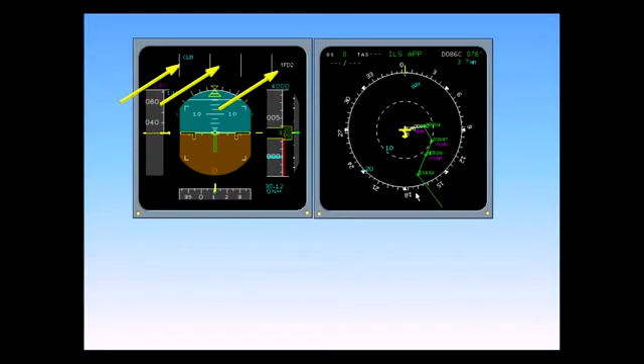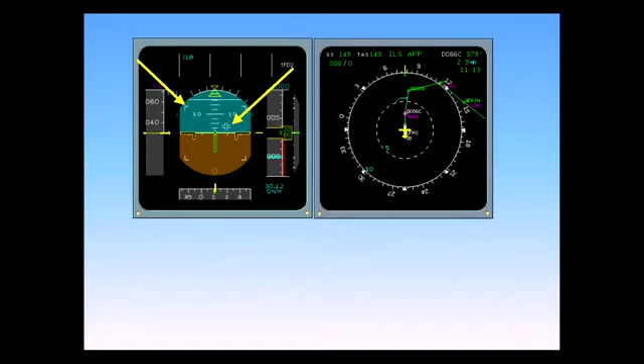Also notice the box corners toward the edges of the ADI and the Maltese cross in the center. These symbols appear after engine start and are used during the flight control check. The cross is a side stick command indicator, what the stick is commanding in pitch or roll. The box corners are stick command limits. The center of the cross should not exceed these limits when performing the flight control check.

The ground roll guidance command bar also appears after engine start, when either TOGA or FLEX is selected, and provided there is an operating localizer on the takeoff runway selected in the MCDU. It replaces the FD vertical bar and is used during takeoff and rollout for assistance during low visibility. All of these symbols disappear after takeoff.

When the thrust levers are placed into the FLEX or TOGA detent, the FMAs indicate MAN FLX 49, meaning that the thrust has been manually placed into the flex detent, and that thrust for the assumed temperature of 49 degrees Celsius has been calculated and set.

Speed select 197 in blue, meaning that a speed other than the default econ speed has been selected. A/THR illuminates in blue, meaning that the auto thrust system is automatically armed. It will engage automatically when thrust is reduced to climb.

The FMA also shows SRS as the vertical engaged mode. SRS, Speed Reference System, commands the horizontal flight director bar to a pitch angle resulting in a speed of V2 plus 10 knots. Should an engine fail, SRS will command a speed of V2 or existing aircraft speed, whichever is higher.

RWY, meaning runway track, is the engaged lateral mode. Runway track is selected by simply turning the heading knob one click in either direction while the aircraft is on the ground. The heading knob must not be pushed or pulled. Runway track can be used up to 400 feet AGL to ensure obstacle clearance during initial climb in case of engine failure.

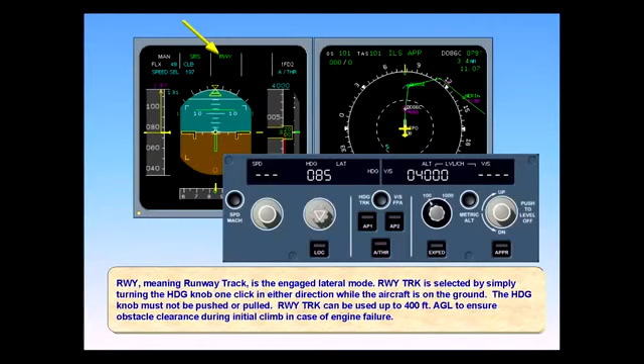At 30 feet, RWY turns to RWY TRK, runway track. This mode provides lateral guidance on the extended runway centerline based on the track memorized during the takeoff roll. The autopilot may be turned on at 100 feet AGL, provided SRS has engaged. If it has not, the autopilot may not be used until 500 feet AGL.

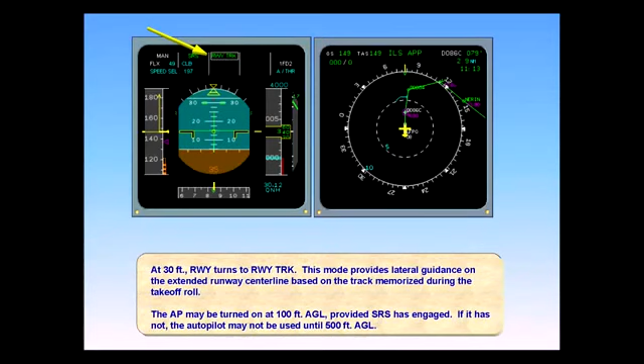At 400 feet AGL, the aircraft must be put into the heading mode. This is accomplished by pulling the heading knob on the flight control unit. At the UAL thrust reduction acceleration altitude of 800 feet AGL, a white flashing message, LVR CLB, appears in the auto thrust FMA. The FMA flashes as a reminder to set the thrust levers to the climb detent. Set the thrust levers to climb.

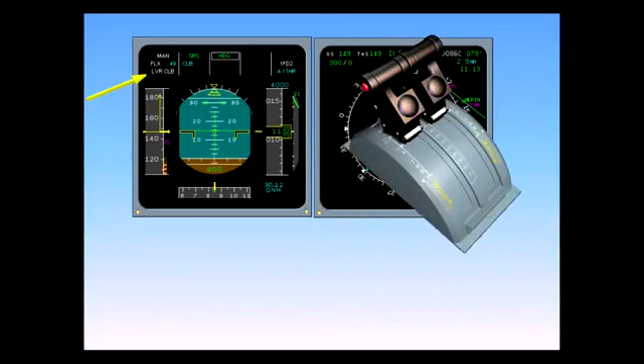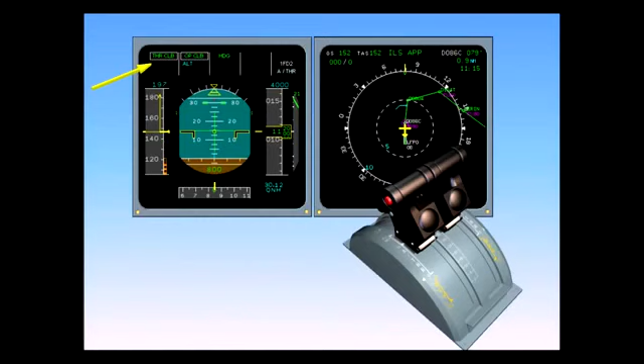THR CLB illuminates in green in the auto thrust FMA column, and A/THR turns white in the engaged status column. The auto throttles have automatically engaged. The system is in the thrust mode and commands max climb thrust.

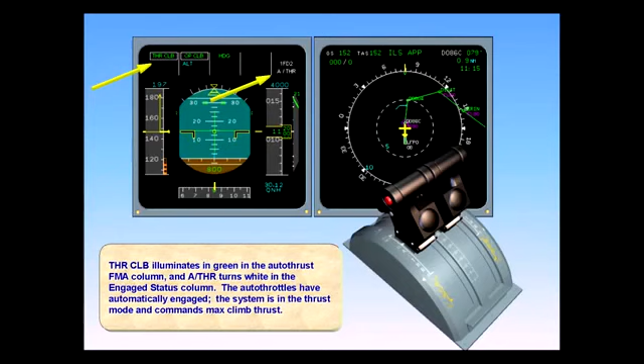Also at 800 feet, SRS has disengaged and the vertical mode now becomes open climb. Since we had changed the econ climb speed to green dot, the FMGC treats this speed as a selected speed. The magenta triangle indicating managed speed disappears and is replaced by the blue selected speed indications. Since 197 knots is off the speed scale, a blue number appears on top of the speed tape. Also, ALT is displayed in blue, indicating that the altitude capture mode is armed.

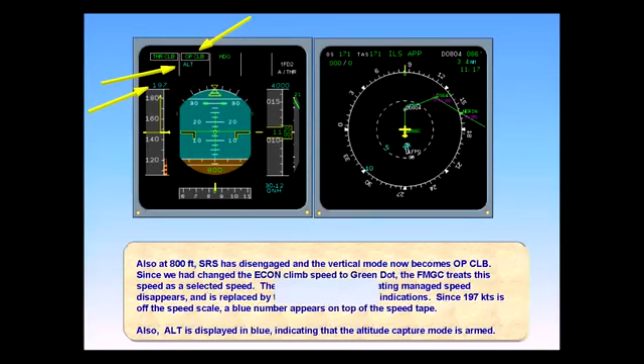The aircraft now begins to accelerate to green dot speed. 60% of the power is used to increase speed and 40% to maintain climb. Flaps and slats are retracted on schedule. Note, the selected speed number has disappeared and has been replaced by the blue triangle.

At 3,000 feet AGL, the aircraft is returned to the managed speed mode by pushing in on the speed knob. Push in on the speed knob. The aircraft is now in the managed speed mode. Managed speed indications appear on the speed tape. Since 250 knots is above the speed tape range, the indication is shown by a magenta number above the speed tape. Also note that the flight control unit's speed window has closed, the numbers being replaced with dashes, and the managed speed light is on.

The following illustration, while not yet part of United's operating procedure, is an illustration of the capabilities of the A320. While there are plans to incorporate procedures like these into the manual, at the present time the most restrictive altitude must always be set on the flight control unit.

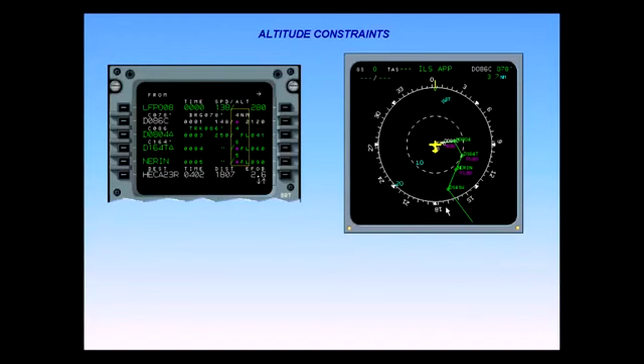The flight plan contains a SID, which was loaded into the FMGC during initial setup. The SID has an altitude restriction of 8,000 feet, as indicated by the magenta dot on the MCDU. Pressing the Constraint button on the EFIS control panel will display the restriction on the ND, whether it be a speed, altitude, or time restriction. Press the CSTR Constraint button. The Constraint button illuminates green, and the altitude constraint of 8,000 feet, which already is shown on the MCDU, is now visible on the ND.

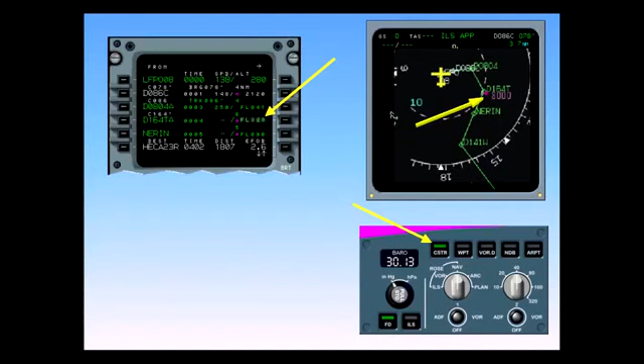We are airborne and level at 4,000 feet. ATC clears us to flight level 230, with the restriction to cross the intersection at or below 8,000 feet. First, we dial in the cleared altitude of flight level 230. Then we command a VNAV climb by pushing in on the altitude knob.

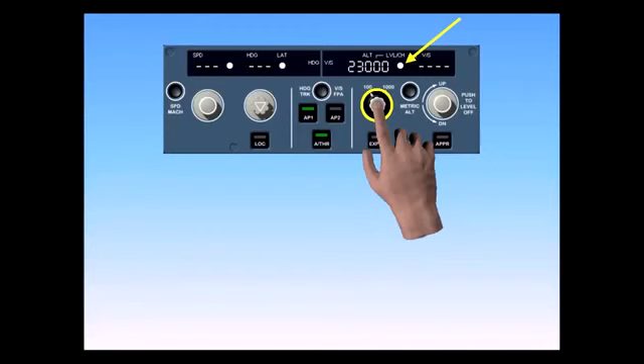Note, the level change light illuminates, indicating that the FMGC is in vertical nav, or VNAV. On the PFD, the primary indication that VNAV is engaged is climb, CLB, annunciated in green in the vertical column. The FMGS has predicted that it will reach the VNAV constraint altitude of 8,000 feet before reaching the intersection. This is indicated by the magenta level point arrow.

On the PFD, the ALT in magenta on the FMA and the target altitude 8,000 in magenta on the altitude scale indicate that the FMGC will level off and capture this restrictive altitude constraint. The aircraft is now approaching the altitude constraint. The altitude constraint mode automatically engages as indicated by the FMA. On the altimeter, the magenta target altitude indicator is moving downward.

The aircraft is now level at the constraint altitude, with altitude constraint in green on the FMA. VNAV is still armed, as shown by the blue climb on the FMA. It will automatically re-engage when the aircraft flies over the constraint waypoint. The re-engagement point is marked by the blue start of climb arrow on the ND.

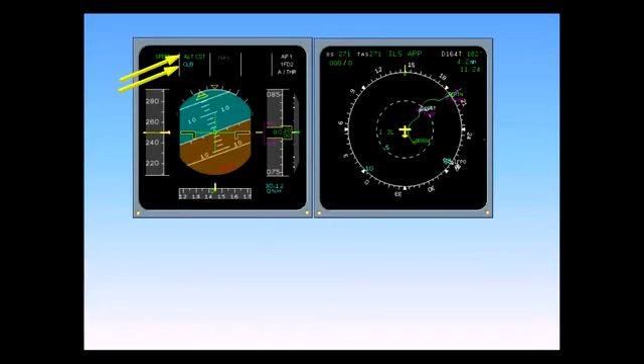You now receive a clearance to cross NERIN intersection at flight level 230, then climb to and maintain flight level 350. After entering the constraint into the FMGC, the system predicts reaching flight level 230 before crossing the waypoint, as indicated by the magenta level arrow. The system automatically reverts to the thrust climb mode, and the new constraint becomes the target, ALT and 23,000 in magenta.

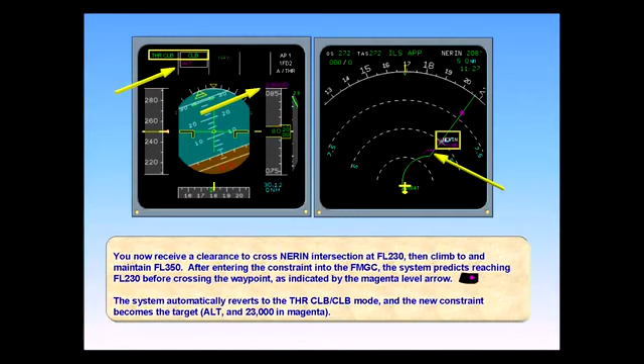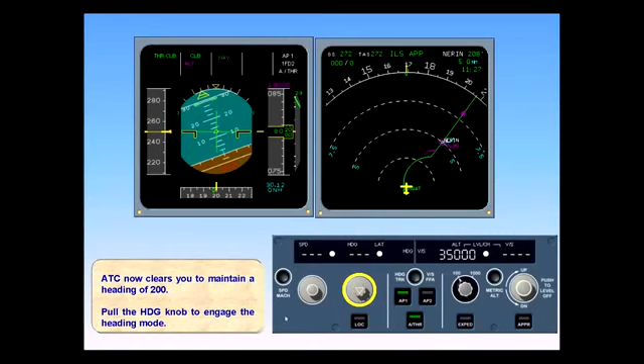ATC now clears you to maintain a heading of 200. Pull the heading knob to engage the heading mode. On the FMAs, climb is replaced by open climb, and the magenta altitude has been replaced by blue altitude in the vertical column, and heading has replaced nav in the lateral column. On the ND, the solid green line now indicates the aircraft track line, and the dotted green line is now the FMGS flight plan.

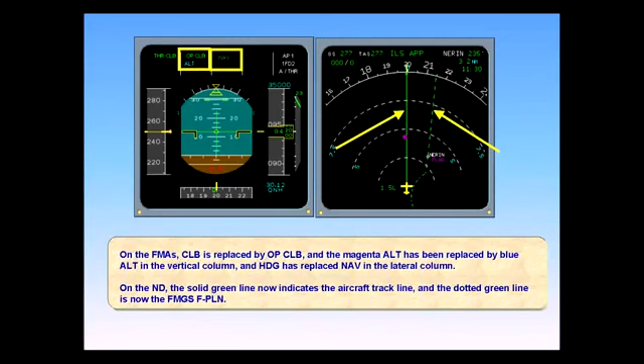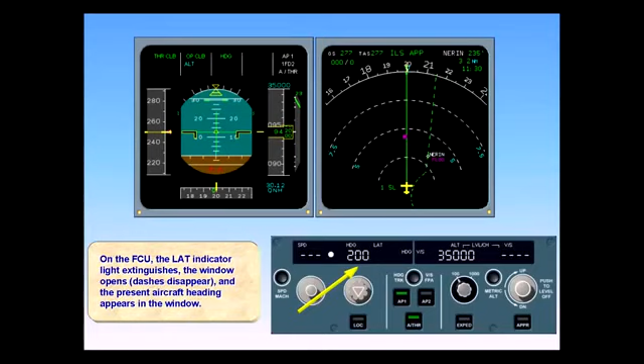On the FCU, the LAT indicator light extinguishes, the window opens, dashes disappear, and the present aircraft heading appears in the window. When the heading mode was engaged, VNAV automatically disengaged and the FMGC automatically reverted to open climb mode. ALT magenta reverted to ALT blue, and the magenta 23,000 changed to blue 35,000.

Altitude capture is now armed to the FCU set altitude, not the lower constraint altitude. When not on the assigned route, the altitude constraints which are assigned to flight plan waypoints must be disregarded. The cardinal rule to remember is LNAV must be engaged for VNAV to operate.

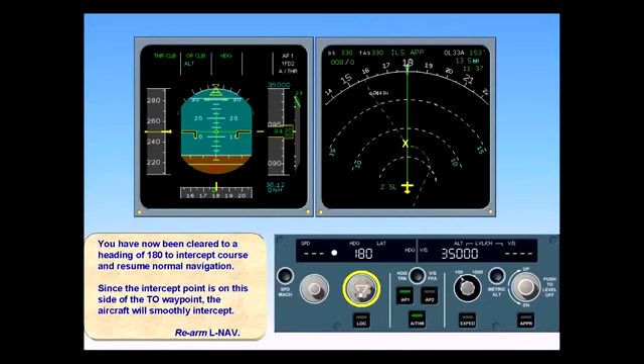You have now been cleared to a heading of 180 to intercept course and resume normal navigation. Since the intercept point is on this side of the TO waypoint, the aircraft will smoothly intercept. Rearm LNAV. Nav is now armed on the lateral FMA, blue. On the FCU, a white dot in the heading window indicates that Managed Nav is armed.

On the ND, the solid green line indicates the track line to the computed intercept point, and then the remainder of the flight plan. If the intercept statement is missing, then the track line is crossing the flight plan beyond the TO waypoint, and interception is not possible without further action.

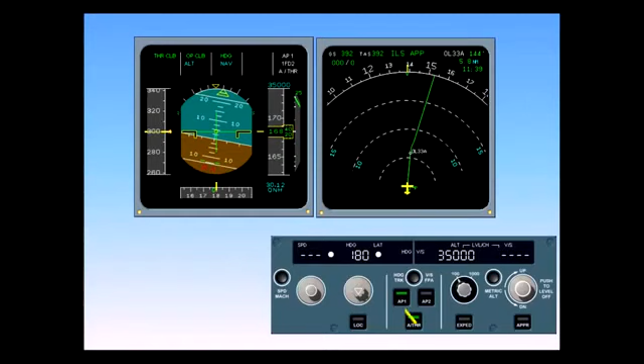When the aircraft closes with the intercept point, the nav mode automatically engages, as seen by the indications on the FCU and on the FMA. VNAV is available again, but since there are no more constraints, it is not necessary to re-engage it. Climb and open climb will now perform the same function.

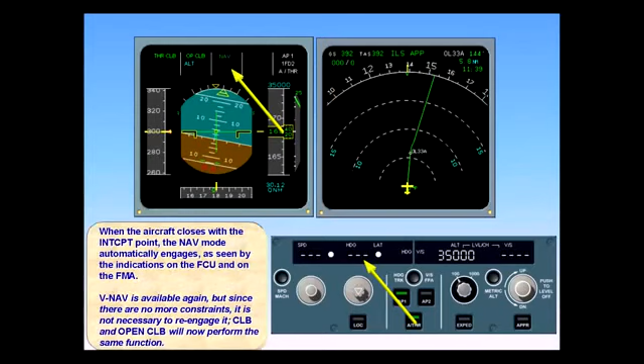Passing through the transition altitude, a yellow flashing STD message appears below the altimeter. The FMGC does not know 29.92 as anything but a QNH barometric setting. Therefore, the barometric set knob on the EFIS control panel must be pulled to set standard, STD. Pull the baro set knob.

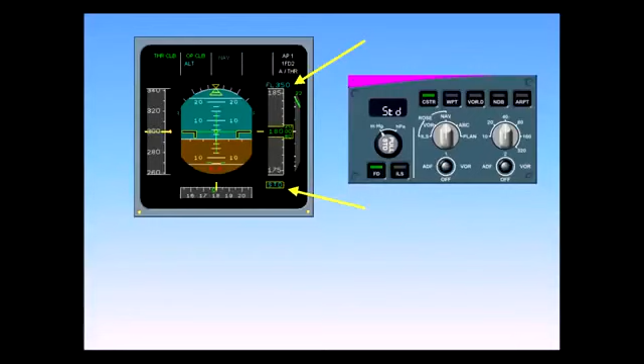The symbol STD now displaces the baro setting. The altitude annunciation on top of the altimeter is changed to a flight level reading. Lastly, the window in the EFIS control panel now reads STD.

You are re-cleared to flight level 290, and now ATC advises that 290 is your final. Since it cannot take radio calls, the FMGS assumes that you will continue the climb to flight level 350 and is therefore still in the climb phase, as shown on the MCDU performance page. You have to change the cruise level on the MCDU progress page. Select the progress page.

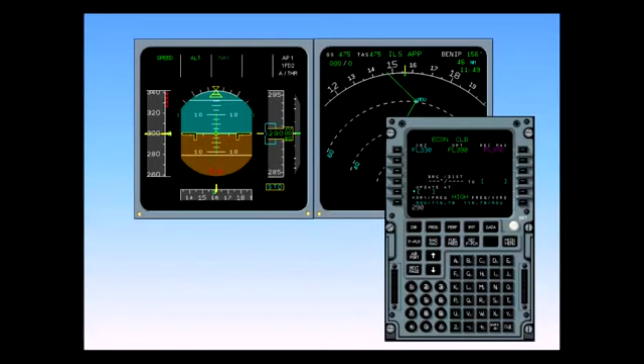Changing the cruise flight level on this page will allow the system to go into the cruise phase. The cruise Mach will be adjusted to its optimum value, which will maximize fuel economy. The new flight level is already typed into the scratch pad. Insert the new flight level. The vertical mode has changed to altitude cruise, and the MCDU page has changed to cruise, indicating that the Autoflight system is now in cruise mode.

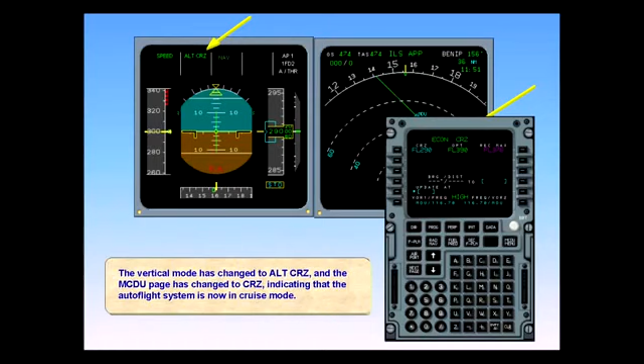The aircraft has now reached the point of descent. ATC has cleared you to flight level 270. Since it is a 2,000-foot step down, you decide to descend slowly, selecting minus 1,500 feet per minute on the FCU vertical speed and pulling the knob. Auto thrust is in speed or Mach mode. The autopilot is controlled by a selected vertical speed.

In this instance, the selected vertical speed has priority over the auto thrust speed mode. This means that if too high a vertical speed is selected, the autopilot will pitch the aircraft down to track the vertical speed target. Even though the autothrust will command idle, the airspeed can increase significantly, even into the overspeed range.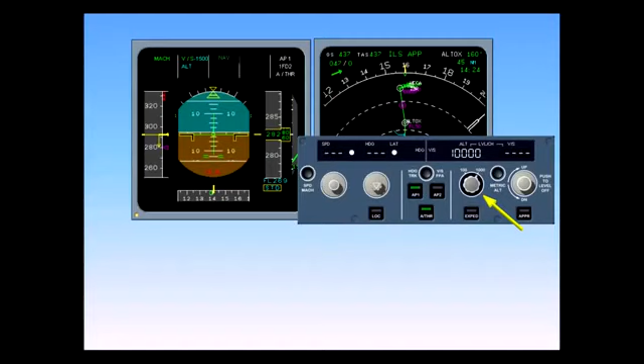You have been cleared to 10,000 feet. Disregarding the econ descent, you have selected 10,000 on the FCU and pulled the altitude selector. Thrust idle indicates that the FMGC will maintain the thrust at idle throughout the descent. The autopilot flight director is in open descent mode. This means that the autopilot commands the pitch so as to maintain the target speed of 280 knots all the way down to the FCU selected altitude of 10,000 feet.

As the aircraft reaches the target altitude, the speed mode automatically engages on auto thrust. Alt-star automatically engages in the vertical mode. Alt-star is the capturing mode, smoothly rounding out the level off. As soon as the aircraft is level, altitude will engage.

We have descended to 2,000 feet and are still in the nav mode with managed speed engaged. To prepare for the approach, we need to put the system into the approach phase of flight. This is accomplished by selecting the performance key on the MCDU. It automatically displays the active phase of flight, descent. Note the prompt at line select key 6 left, activate approach phase.

Activation gives us automatic speed control if speed is in the managed mode: green dot if clean, S speed if flaps 1, F speed if flaps 2 or 3, and V approach if flaps are full. If you are still some distance from the airport and wish to activate, the use of selected speed is recommended to prevent being 40 miles out at green dot.

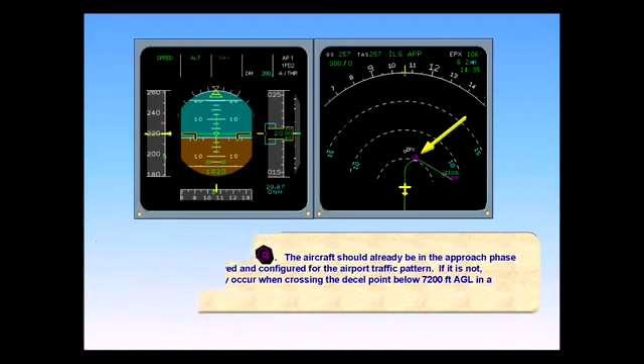If the aircraft overflies the deceleration point with managed speed engaged, the aircraft will automatically begin slowing to a speed appropriate to the aircraft configuration. Even if you are in selected speed, the approach phase will automatically activate. However, the aircraft will not slow, since a selected speed will override a managed speed.

You are flying an intercept course toward the ILS and have been cleared for the approach. Display the ILS raw data. The ILS switch illuminates green and the raw data ILS scales are displayed on the PFD. On the FMA, a decision height of 200 feet has previously been inserted into the MCDU performance page.

Now press the approach button to arm the approach modes, localizer and glide slope. Press the approach button. The approach button illuminates green. On the FMA, the localizer and glide slope are armed, blue. When you press the approach button, the localizer and glide slope modes become armed because you have inserted an ILS approach into the flight plan.